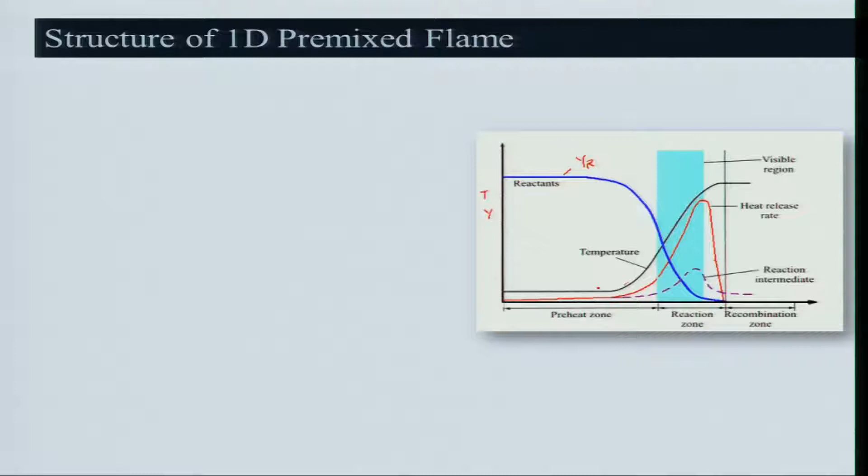So the flame can be broadly divided into three categories—that is, the flame zone can be broadly divided into the preheat zone, the reaction zone, and the recombination zone.

What is really happening in this preheat zone? The temperature is not really going up, but slowly increasing in this zone, because there is negligible heat release. Heat release is very small in this domain, though the temperature also shoots up somewhat. So negligibly small heat release occurs, and certain chemical reactions do take place in this zone, which I have not shown—maybe species like HO2 or HO occur here because the temperature is slightly shooting up. But if I compare this preheat zone with the life of a human being, what would it be?

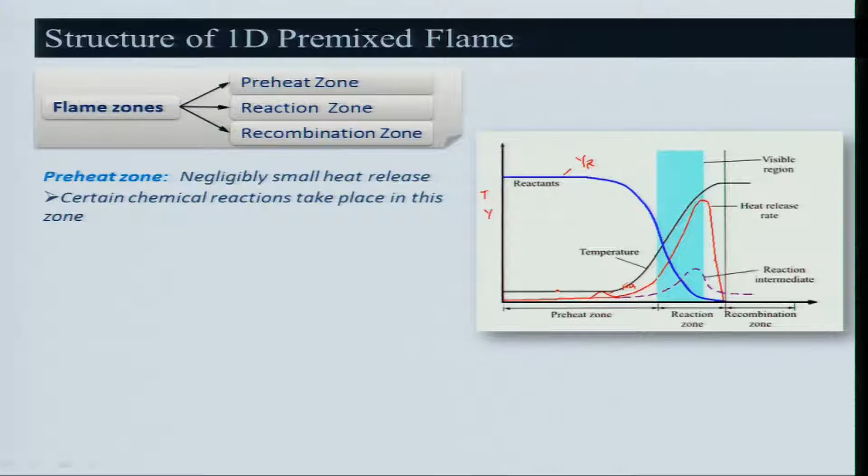Nothing really is happening productively so far as flame is concerned. Flame is basically where the exothermic reaction takes place. If you look at this zone overall, whatever reaction is occurring, the net effect will be nullified - neither exothermic nor endothermic, temperature remains constant, but in this case there will be a little bit of increase.

This will be similar to student life, where you are being prepared to do productive work during your adulthood, kind of thing.

Keep in mind this is the reaction zone which is very thin as compared to the preheat zone. In the reaction zone most of the chemical energy is released in the form of heat, and decomposition takes place - but not really in the reaction zone itself, it takes place at the beginning of or just before the reaction zone, as there will be pyrolysis products from decomposition of the fuel. For example, propane will be converted into methane and some other things, and so on. This creates radicals to be consumed in the reaction zone.

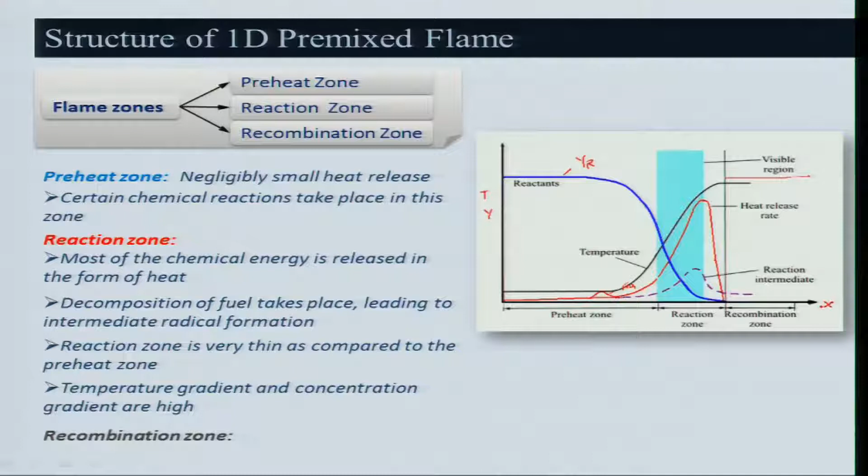The recombination zone - this particular zone - is basically where I have shown temperature should be almost flat, with no change along the x direction. But in a real situation, particularly for a hydrocarbon, there will be some recombination, like carbon dioxide and water being formed, and some amount of heat released. As a result, the temperature profile will increase towards an asymptotic value, which I have not shown deliberately, because I want to simplify and analyze it.

So if you summarize, the flame zone can be divided into three categories: preheat zone, reaction zone, and recombination zone. You should be careful about this, because we are not bothered about the recombination zone when analyzing this one-dimensional flame - we will be concerned about the preheat zone and reaction zone. One has to look at what is really happening here.

Like if you look at the various processes occurring - on the thermal side, there is conduction, convection, and also radiation heat transfer taking place, and some chemical reaction will be taking place, preparing the fuel and oxidizer to be burnt in the reaction zone.

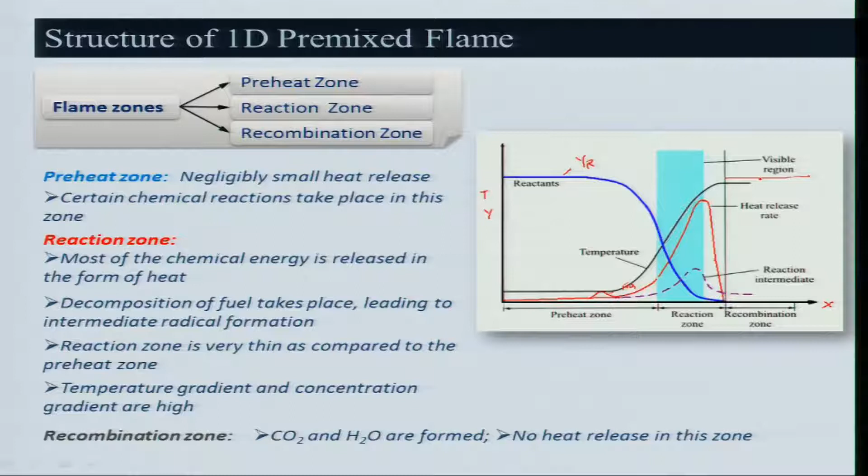In the recombination zone, no heat release occurs in our case, but whatever heat release occurs in real situations is very, very negligible small as compared to the reaction zone.

For the practical analysis we will be doing, this is our reaction, the flame. Looking along the x direction, when x is very far away, that means x is infinity, what will happen to temperature? Since the temperature profile is shown here, the gradient dT/dx will be 0, yes or no? This is my origin.

If I go away from the origin towards the left hand side, this will be minus infinity, x equal to minus infinity. What will be the temperature gradient then? Again dT/dx is 0. Similarly, for mass fraction of fuel and oxidizer, this condition will be valid.

Keep in mind we are saying in this reaction zone the ignition temperature Tig will be there, which is closer to Tf, the flame temperature. That is an assumption we are making, but it is not bad - that means Tf minus Tig is very, very small. This assumption will be used for deriving a relationship for burning velocity.

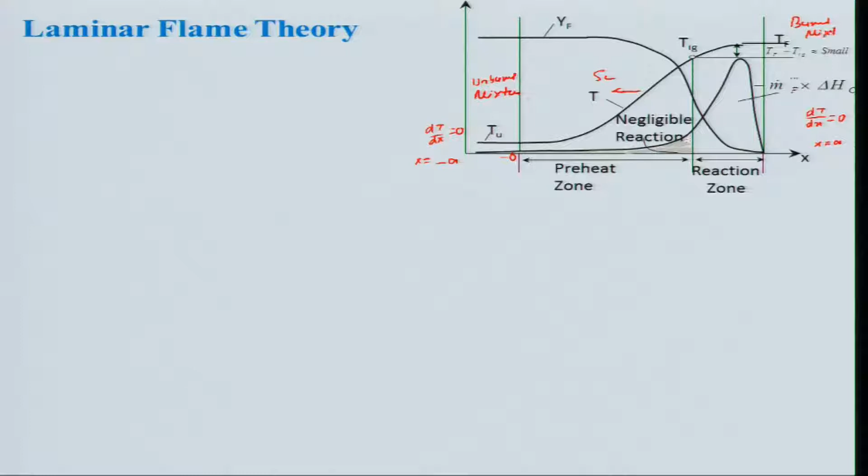The flame front will be moving with SL, the burning velocity, towards the unburned mixture. This side is unburned mixture, right? And this side is burned mixture. So we will make certain assumptions before looking at the equations and simulating it.

What are the simple assumptions we have made? One dimensional, steady, inviscid, laminar flow, because we are talking about laminar flame theory. We want to understand and derive a relationship for laminar burning velocity. This burning velocity is with respect to the unburned mixture, because the flame is moving towards it.

The flame is quite thin, that is an assumption we are making, and it will be dependent on what? The thickness of the flame - will it depend on the fuel and oxidizer type, or on the fuel-air ratio? Will it depend on inlet temperature? Will it depend on inlet pressure? These are questions that might be lurking in your mind.

But we are assuming the flame to be thin, like a surface. So we will see that the ignition temperature is very close to the flame temperature.

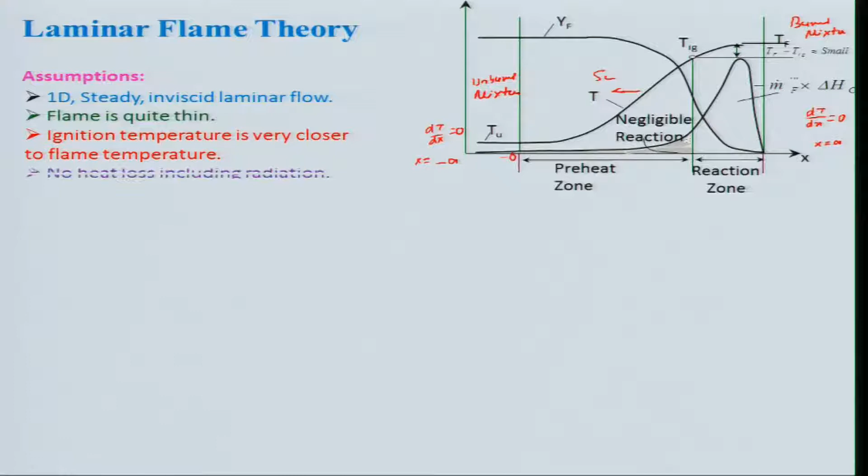We have this assumption, and no heat loss including radiation we are assuming. Is it possible there will be a flame when there is no radiation or heat loss? Of course it is possible, provided there are two kinds of radiation - gas phase and solid phase if soot is there - but we are assuming no soot in this flame, so that is negligible, and gas phase radiation will be very small. In real situations radiation will be there, you cannot eliminate it, but we are assuming it has no effect on the analysis.

Pressure difference across the flame is negligibly small. You can invoke what we discussed in the last lecture about combustion waves and find the pressure difference will be very, very low. Therefore, we will not be considering the momentum equation. Why will it be low? Because it is a deflagration, but if it is detonation, we cannot manage to have this assumption - we cannot.

So, we will not be considering the momentum equation, and keep in mind that we are assuming binary diffusion, which means Fourier's law and Fick's law will be valid. Because we are assuming binary diffusion, we are talking about a single step chemistry here. If it is a multi-step chemistry, which naturally occurs in the flame, then this assumption won't be valid.

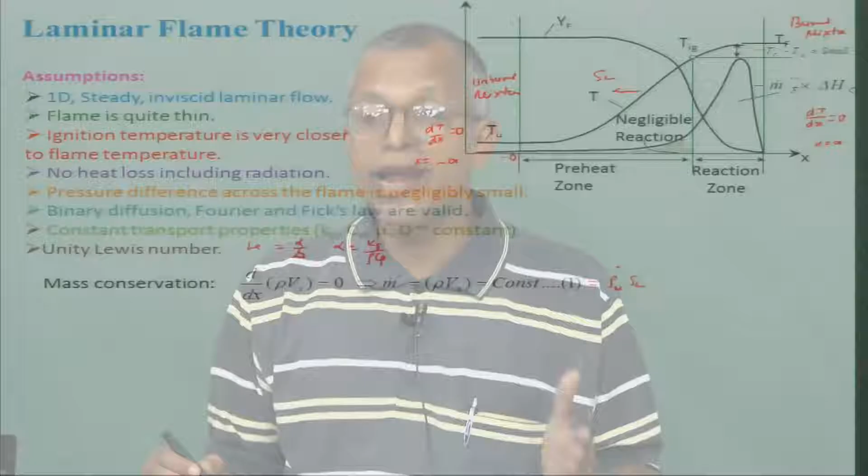So basically, all this analysis we are doing, we are interested to derive a relationship for burning velocity, and that comes from the mass conservation. We will be looking at this burning velocity SL to find out. As I told you, we are using a single step chemistry model for this: 1 kg of fuel reacting with nu kg of oxidizer, going to the product of nu plus 1 kg of product, P. Therefore, we need to look at the species equations for fuel, oxidizer and product.

Let us consider the species conservation equations as I have enumerated here for fuel, oxidizer and product. These equations are basically similar. Let us consider the species conservation equation for fuel, which has 3 terms. First is the convection term, rho Vx dYf by dx, which will be equal to the diffusion term and the mass consumption term, the consumption of fuel.

If you look at this diffusion term, it is rho D d square Yf divided by dx square, and keep in mind that this diffusivity we have considered is binary in nature. That means this diffusion is between two species, whereas in an actual system multi-component diffusion would likely take place.

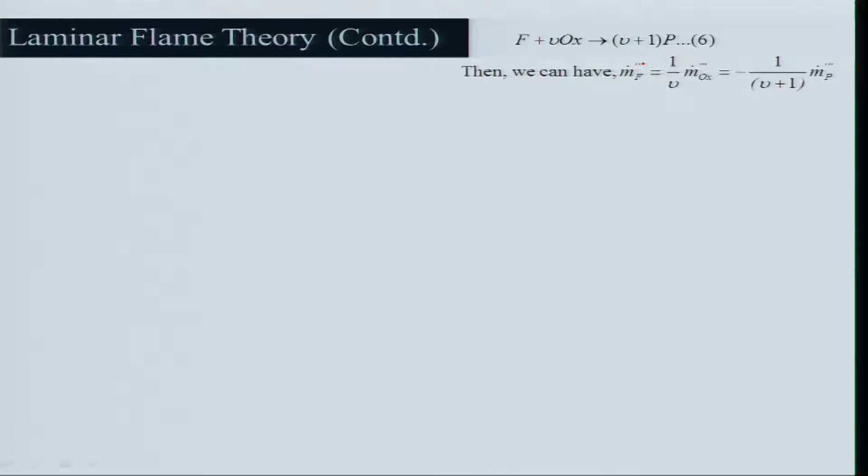So, we are looking at 1 kg of fuel reacting with nu kg of oxidizer going to the product of nu plus 1 kg of product. We can write m dot triple dash f, the mass of fuel per unit volume being consumed, equals 1 over nu times m dot triple dash oxidizer, equals minus 1 over nu plus 1 times m dot triple dash p. Why minus? Because fuel and oxidizer are being consumed, whereas product is being formed. Instead of writing minus here, I have put it here, so it is okay.

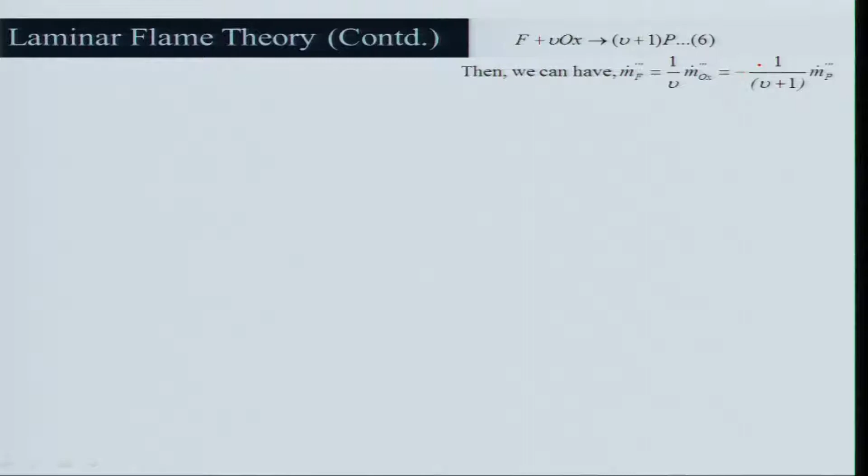So, let us look at how we can do this. I can expand this term Hf I m dot I as Hf f o plus m dot triple dash f. Similarly, I can write down for oxidizer and for the product. If I substitute these values, for oxidizer, m dot triple dash oxidizer will be nothing but nu m dot triple dash f, so that is this term. And similarly, from here I can get this term.

If I take this m dot f out, what will I get? I will get Hf plus nu Hf oxidizer minus nu plus 1 Hf product, and that is nothing but your heat of reaction. This is your heat of reaction.

What we will be using, as I told you, is that we will only consider the energy equation as the Lewis number equal to 1. Once we solve that, we can really look at how the fuel or oxidizer mass fraction changes with respect to the x axis, or along the length of the flame. That is a very important assumption, which we will discuss in detail when we talk about droplet combustion.

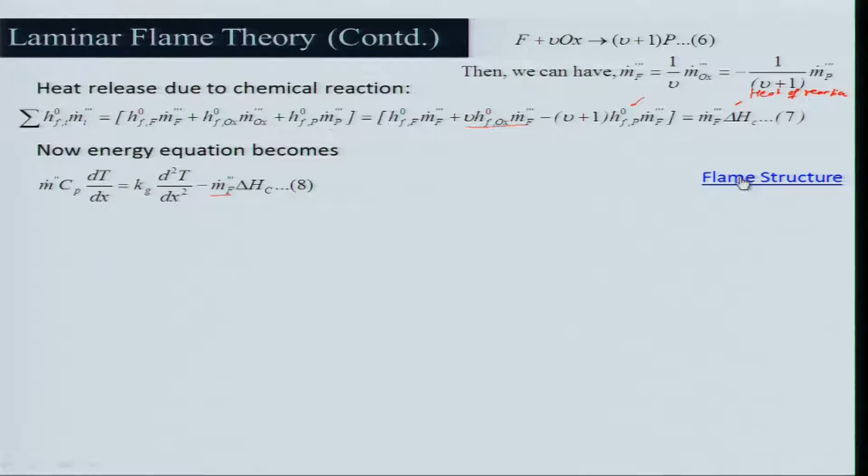If you look at what we are doing to solve this equation, because it's quite complex and non-linear, we will be looking at the preheat zone, which is more predominant here. There will be convection and conduction. But the heat release term will be negligibly small, because this is a very small portion.

So we can neglect that. In the reaction zone, we will be neglecting the convection term, because whatever heat is released will be carried away by conduction, since the temperature gradient is very high. So we can neglect that convection term there.

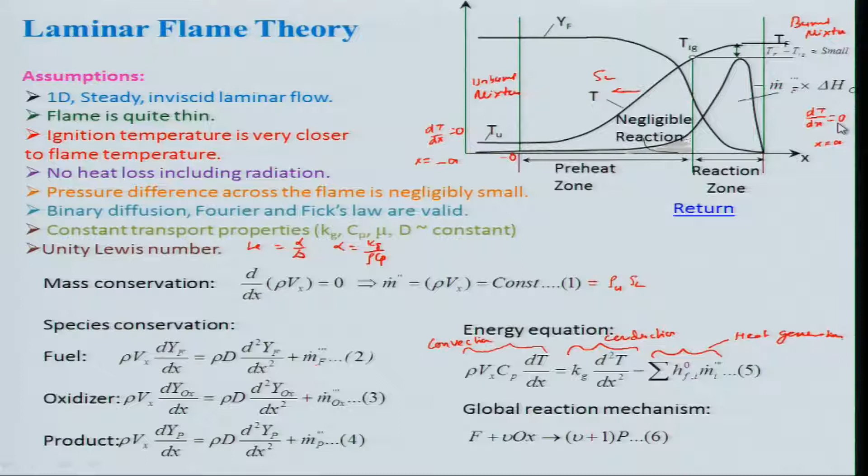I have already told you that at x equal to minus infinity, dt by dx is 0, and at x positive infinity, far away, dt by dx will also be 0. The boundary conditions are t equals t u at x minus infinity with dt by dx 0, and at x positive infinity, t equals t f with dt by dx 0. We will be looking at this preheat zone.

In the case of the preheat zone, this term will be 0. Therefore you will get m dot Cp dt by dx equals kg times d2t by dx2. That means whatever conducted heat is coming from the reaction zone is being balanced between conduction and convection - through conduction it comes, and it is convected away. That is the balance.

For the preheat zone, these conditions have to be valid: at x equal to minus infinity, t equals t u with dt by dx 0, and at x equal to minus x ignition, t equals t ignition. You want to decouple this equation and solve it, divide and rule, but you land in one problem - I don't know this T ignition. So how to do that, we will see a little later on.

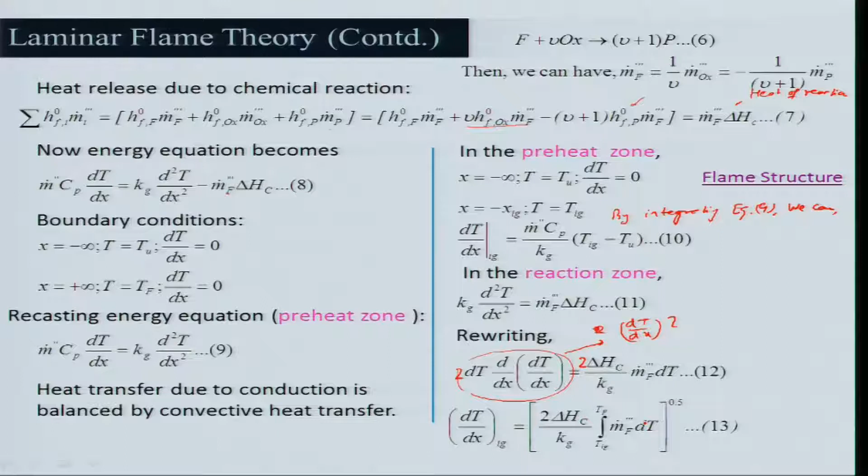We can still use this expression. Equations 10 and 13 we can club, because this is T ignition and this is dT by dx at ignition. The right hand side of equation 10 will be same as the right hand side of equation 13. So that way we are avoiding this temperature gradient at the ignition point.

So combining equations 10 and 13, we are getting m dot double dash Cp by kg, T ignition minus Tu, equal to root over 2 delta Hc by kg integrated over m dot triple dash f dt, integrated over T ignition to Tf.

So if you look at this, we are still not solving it, because we need to integrate this, and that integration is not really possible since you do not know how it varies with temperature, and T ignition is also not known. So you will have to do some approximation. I can simplify this: m dot double dash is equal to kg by rho Cp times 1 over this, just rewriting equation 14 in this fashion.

We know that m dot double dash is nothing but rho u S L from the continuity equation. So I can write rho u S L equal to this. Combining equation 15 and 16, I can get S L equal to kg by rho u Cp, because rho u has gone over here and the rest is same as equation 15.

Now what we need to know - here I have introduced Tf minus Tu in place of T ignition and Tu. What we are assuming is that T ignition minus Tu is approximately 3 by 4 of Tf minus Tu.

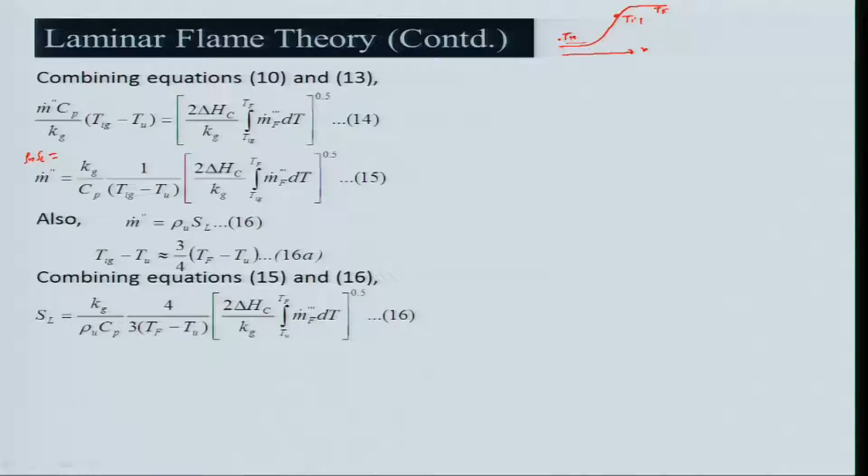So we still have a problem with this m dot triple dash f dt by Tf, but we can assume that the mean fuel burning rate per unit volume will be m dot f triple dash. That term is nothing but m dot f triple dash averaged over the region, because it is changing - this mass burning rate is changing in the region from here to here. If you look at this zone, it is changing, this is your m dot f, it is a changing reaction rate, in other words.

But here we are saying, we are not bothered about integration, we will say it is average. What is that average? It will be approximated as the reaction rate in Arrhenius form: molecular weight of the fuel, AF, concentration of fuel raised to N1, concentration of oxygen raised to N2, e power to minus E by R u T. If I know these values AF, E, and the concentration, which comes from the fuel-air ratio, I can estimate this, provided I know the temperature, and that temperature will be some kind of average.

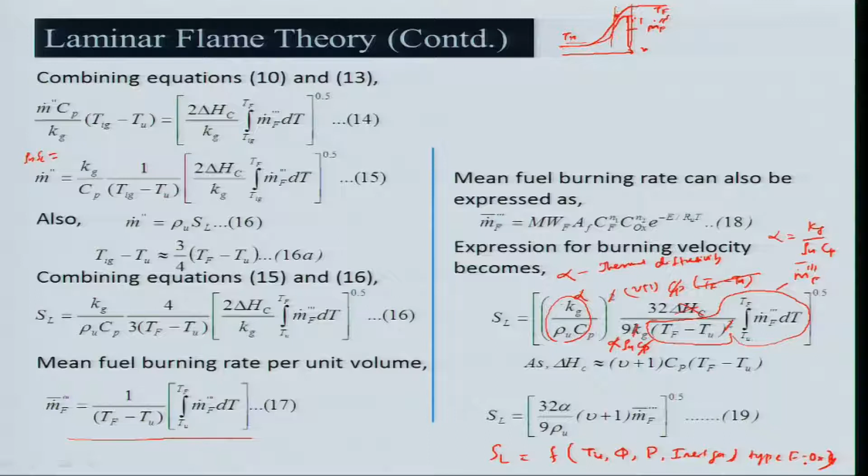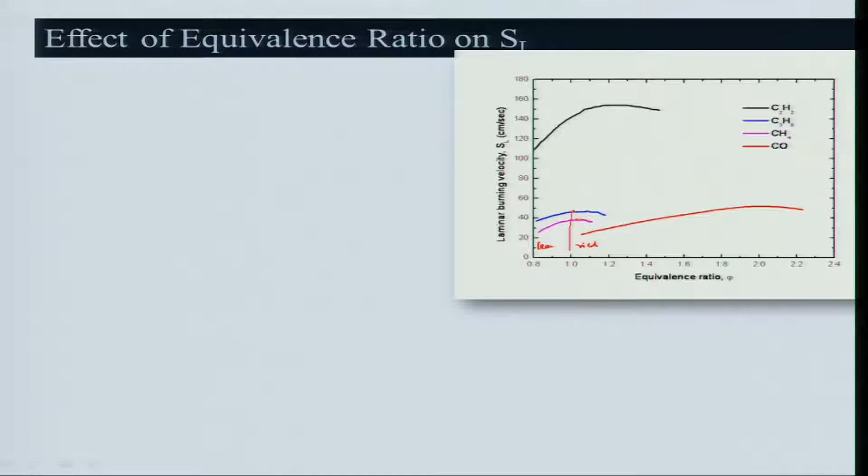Now let us look at the effect of equivalence ratio. Here we have CH4 air laminar burning velocity plotted on the vertical axis, with equivalence ratio on the horizontal axis. Equivalence ratio is fuel by air divided by fuel air stoichiometric. For methane air, you see this line decreases on the lean side, since this point is stoichiometric. So this is lean, and this is rich. For propane air, the values are a little higher, but the behavior is similar in nature.

So if you look at hydrocarbon air, 25 to 50 is the peak value, because this is around 37 kind of peak value, this is around 40, 42, even some mixtures will be there, 50 kind of.

But acetylene, C2H2, is also a hydrocarbon, but is an exception, where it has a very high burning velocity, but its peak value does not occur at stoichiometric. It occurs not at stoichiometric, but a little bit around 1.05, which is where for general hydrocarbons like methane, propane, butane, pentane it occurs. But for acetylene air, the peak value will occur somewhere on this side.

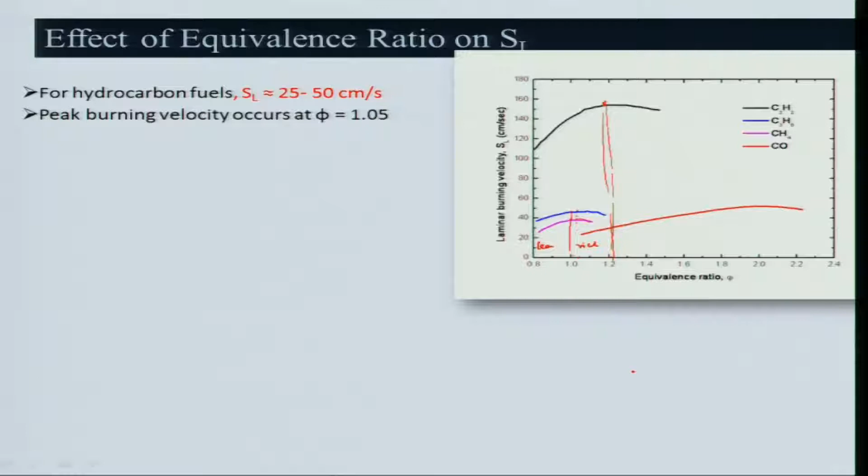As I told you, for hydrocarbon air, the peak burning velocity occurs at 1.05, and hydrogen air mixture, which I have not shown in this diagram, has very high values, with peak burning velocity occurring at phi equal to 1.8.

Similarly, for CO air, you can see the phi peak value occurring around 2 kind of thing. Another very important thing you should know is that SL is proportional to the molecular weight inverse. That means as molecular weight increases, the burning velocity will decrease.

And that is the reason why maximum SL burning occurs under fuel rich condition. That is one reason people talk about. As I told you, for CO air mixture, the maximum occurs under fuel rich condition.

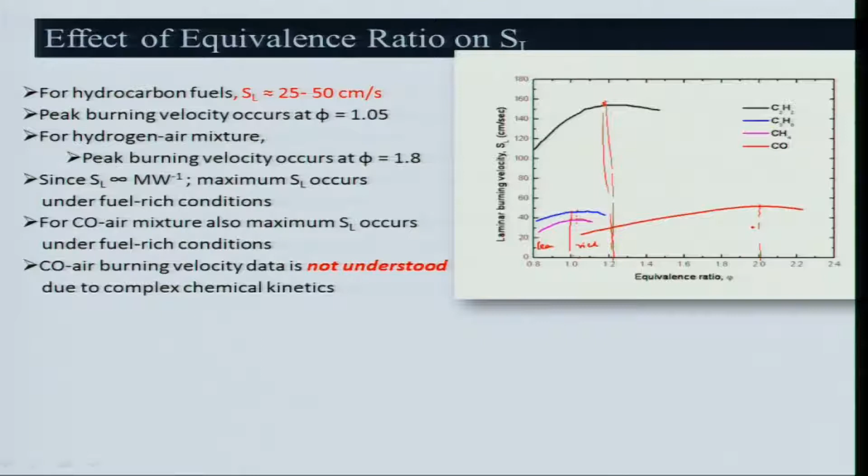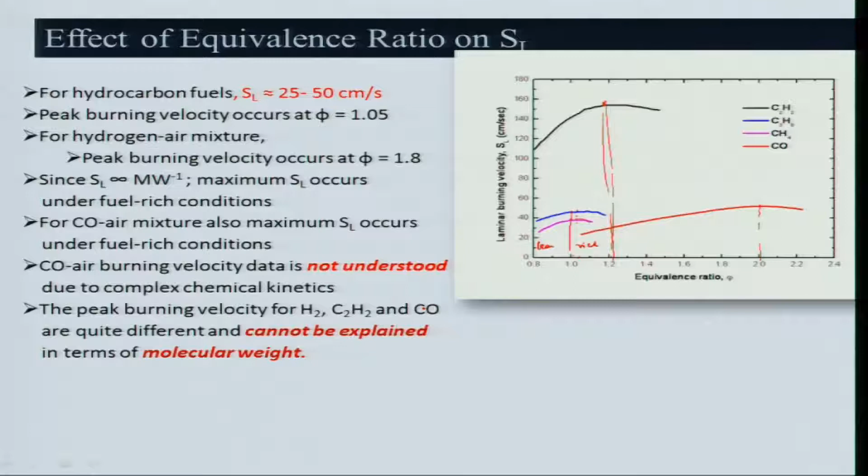So let us look at the effect of initial pressure and temperature on the burning velocity. If you look at SL, we have derived that SL equals 32 by 9, alpha by rho u, times nu plus 1 into m dot f triple dash average.

What is this saying? If I look at alpha, alpha is basically proportional to temperature to the power 1.75, and inversely proportional to pressure. That means if pressure increases, alpha will decrease.

Whereas m dot F triple dash over rho u, it will be P to the power n minus 1, because the P power n comes from the concentration, and minus 1 from the rho u, and of course there is temperature dependence as well.

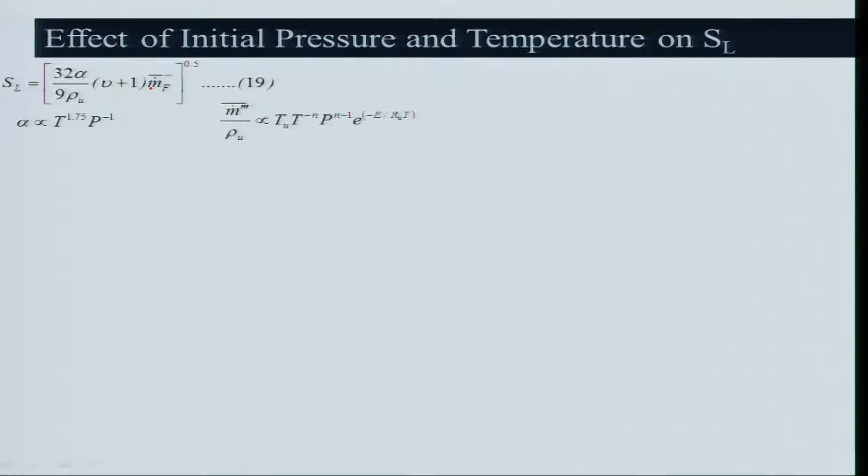Now if I look at this, SL will be dependent on these n values. N is the overall order of the global chemical reaction, like that kind of thing.

So then SL is proportional to P to the power n minus 2 divided by 2, because it comes from a square root, therefore divided by 2. This relationship is supported by experimental data. These n values will vary for reactions like hydrocarbons, depending upon fuel air mixture ratio and other things.

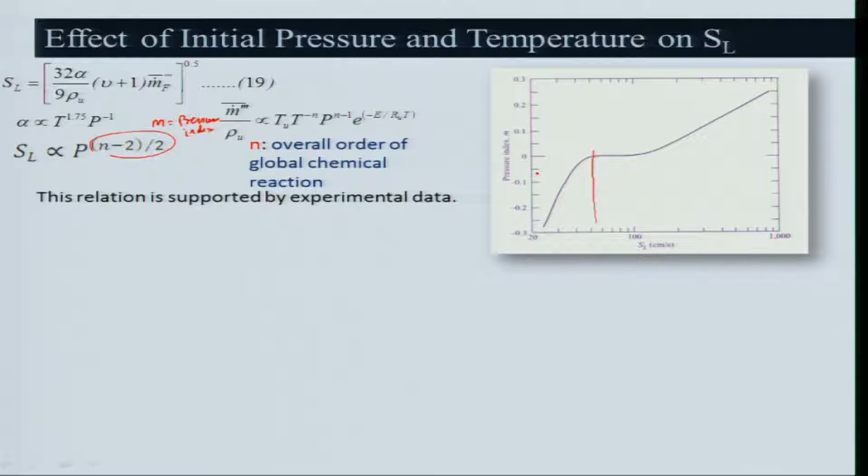So let us look at how this is supported. This value is basically m, known as the pressure index, which is being plotted here with respect to SL. When the burning velocity is in a certain range, what you are getting is that the pressure index is negative.

That means it will occur when n is less than 2, then m will be negative. That means it will not be a second order reaction, but rather maybe 1.5, 1.4 or something like that. N equals 2 means second order reaction, right. N less than 2 means it is less than second order reaction. Keep in mind this is not an elementary reaction, this is a global reaction. And in an elementary reaction, you really can't get these fractional values.

That is also important. So then what you are getting for a hydrocarbon flame, when n is there and will be occurring less than 50 kind of things, 20, 30, 40, 50, yeah this is 50, right. What do you see? The m is negative.

What is the meaning of that? That means, when pressure decreases, what will happen? The burning velocity will increase, right. Why? Because this is a negative value.

If pressure decreases, SL will increase; if pressure increases, SL will decrease. So this is the term where n is equal to 2, then what happens to m? M is almost remaining constant. If it is constant, that is 0, meaning the burning velocity is independent of pressure.

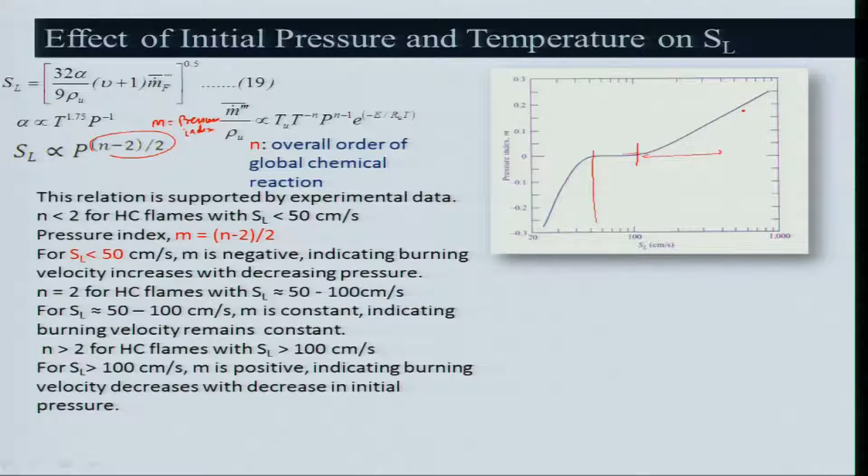Burning velocity will not change with respect to pressure, which occurs only when n is second order reaction. But in real situations it may not always be so; in certain regimes it may occur, in others it will be different. So when n is greater than 2 for a hydrocarbon flame, particularly when SL is greater than 100, in this regime, m is positive, so the burning velocity decreases with decreasing initial pressure. So you can draw a conclusion that burning velocity varies with pressure depending on the order of reaction or the system you are talking about.

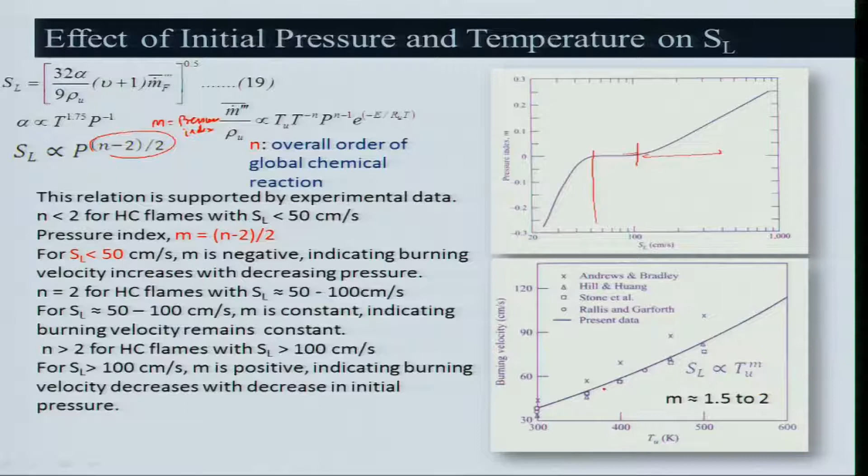So let us look at how it is varying. If you look at these variations, you will find that temperature is basically affecting the burning velocity. With increase in temperature, the burning velocity increases, as I have shown here for methane air flame, and the m values vary from 1.5 to 2. That is the relationship you can get. Generally, it increases with respect to the inlet temperature.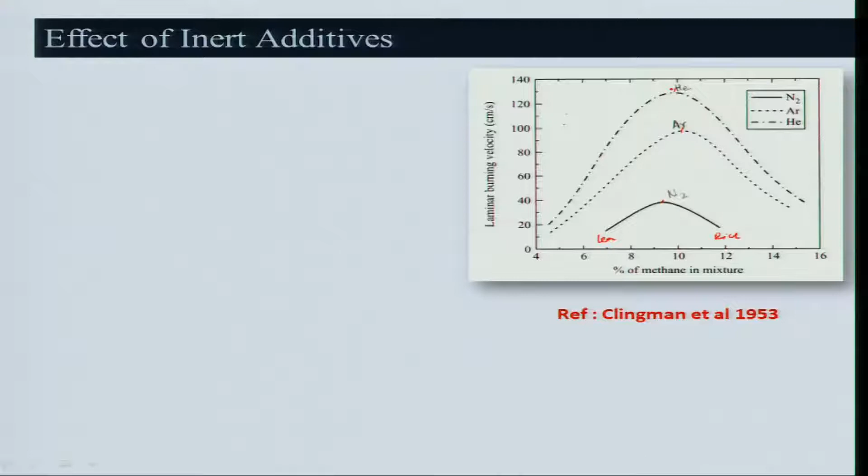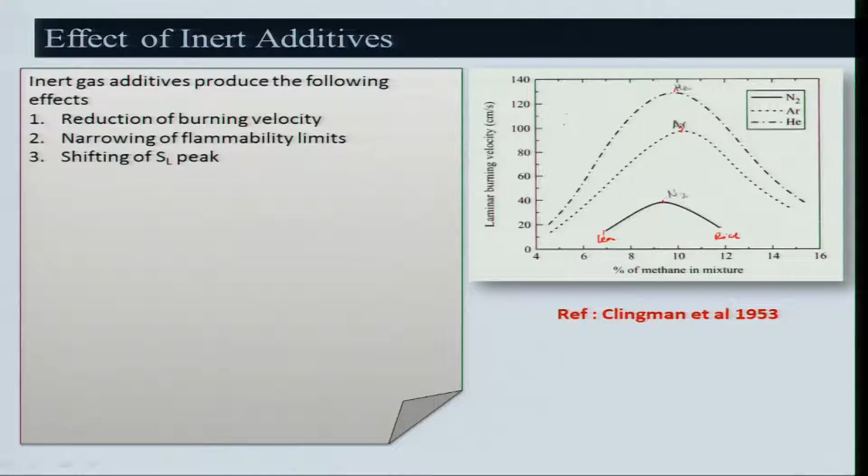Similar observation holds for argon and helium, where burning velocity changes with the percentage of methane in the mixture. As you substitute nitrogen with argon and helium, the burning velocity increases, but the peak value also shifts toward the right, meaning more fuel. So there is a reduction in burning velocities as you go from helium to argon to nitrogen, and a narrowing of this flammability limit - the mixture range within which combustion can occur, beyond which it cannot. It narrows as you go from helium to nitrogen, along with the shift of peak burning velocity already discussed.

But why is this? Because addition of inert gases changes the ratio of thermal conductivity to specific heat - burning velocity is proportional to alpha, the thermal diffusivity. So a similar effect occurs, resulting in a change in the burning velocity.

Burning velocity with helium addition is higher than with argon and nitrogen. Why? Because the molecular weight changes - nitrogen is heavier than argon, argon is heavier than helium. With this molecular weight reduced, the burning velocity increases; burning velocity is proportional to mW to the minus 1, which comes from the reaction rate. Recall that reaction rate is proportional to the average mW with a root over term, so it comes from that.

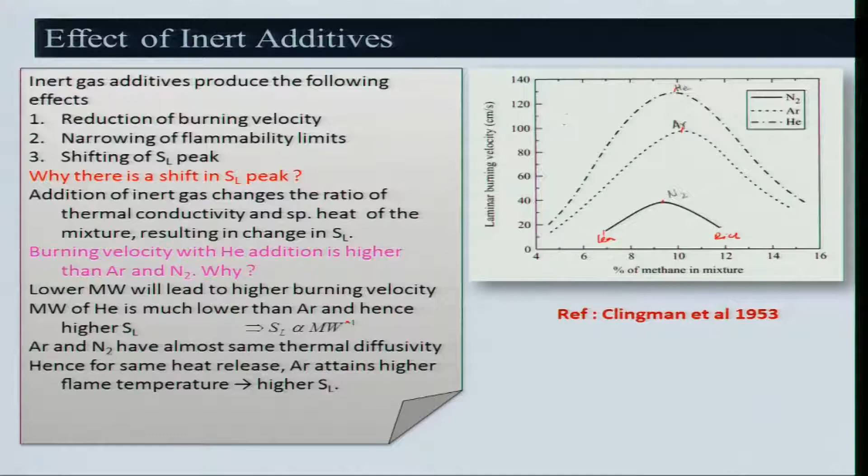Argon and nitrogen have almost the same thermal diffusivity and the same heat release, but argon attains a higher flame temperature, giving higher SL. That is why you get that result. With this we will stop, and continue the discussion in the next lecture.